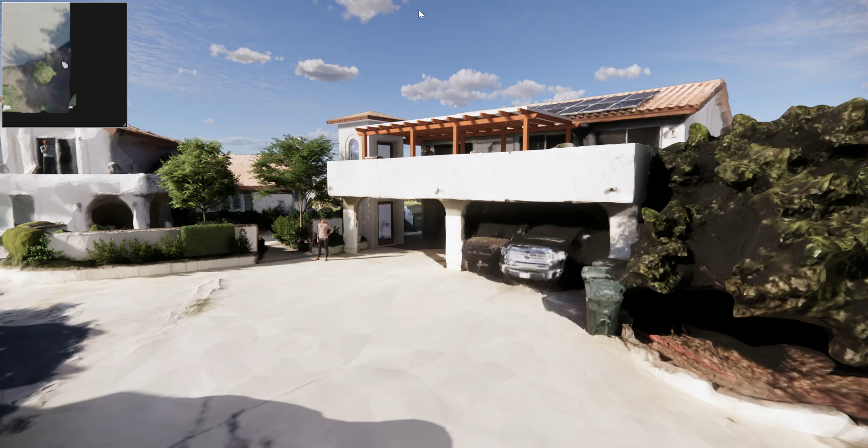So here's an update to the White Residence vertical platform lift enclosure.

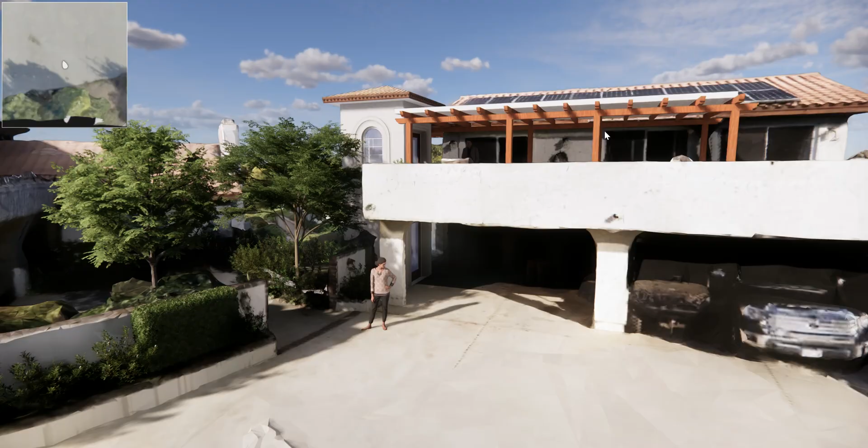I've reworked the pergola to have the columns not in front of that door, which is a good call. So they're kind of flanking each door opening. It's not perfectly spaced across here, but we've got a bigger module, smaller than bigger. It's still kind of symmetrical in and of itself. I also rotated the orientation of the members going across here. I think it's the correct orientation to have them sticking out, so they shield it nicely as you're back here.

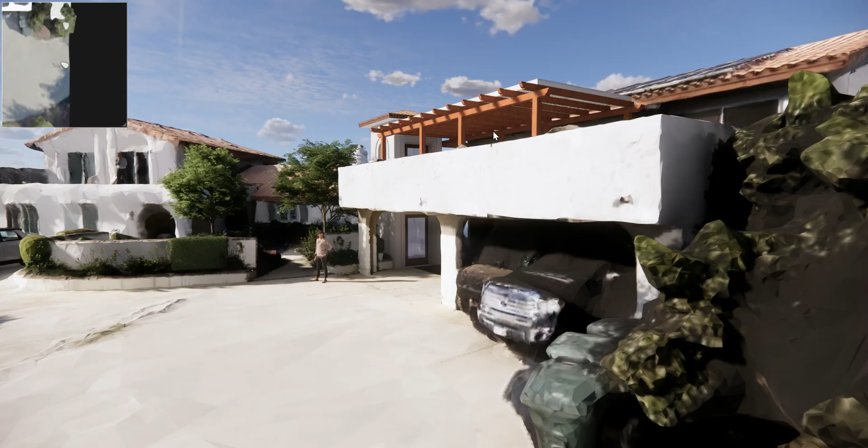And then with the operable shade device sitting on top, I changed it - so let me confirm first here.

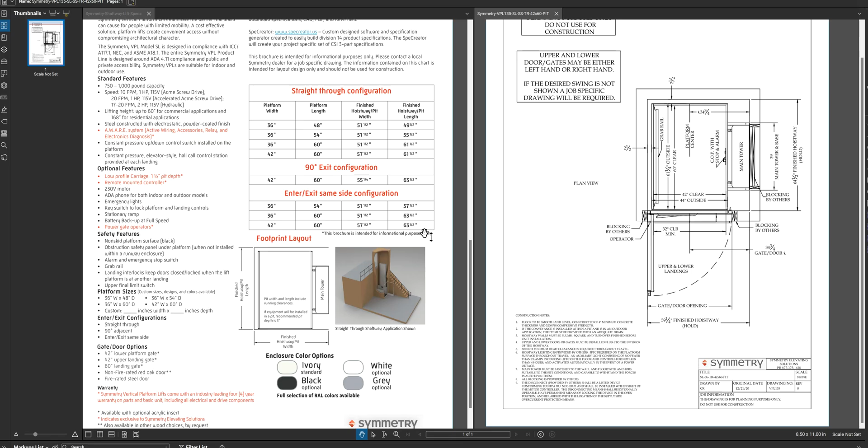So this is the model we're using - it's the 42 by 60 inch platform. This is the cut sheet, and I think it's the VPL 135, that's the drawing number. The title also says SLSSTR 42 by 60 pit, so we can confirm that's the right one. So it's the bigger one.

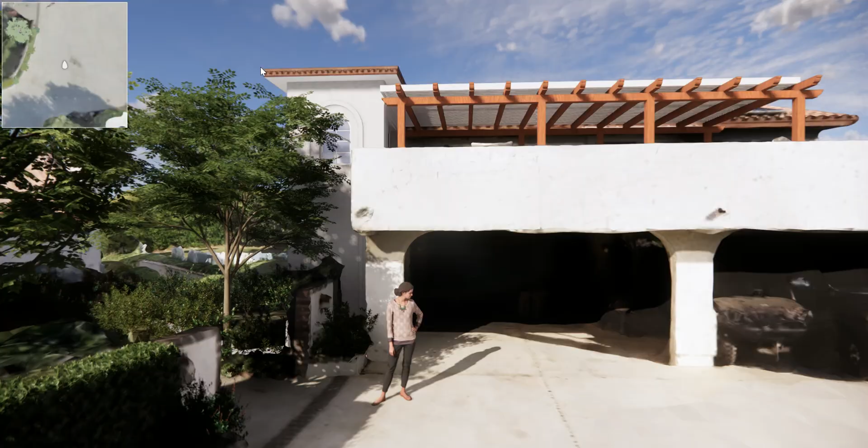And yeah, we definitely can look at a smaller platform lift and reduce the size of this shaft if we want to. I do have this key plan up here now, so we can kind of see where we're walking around.

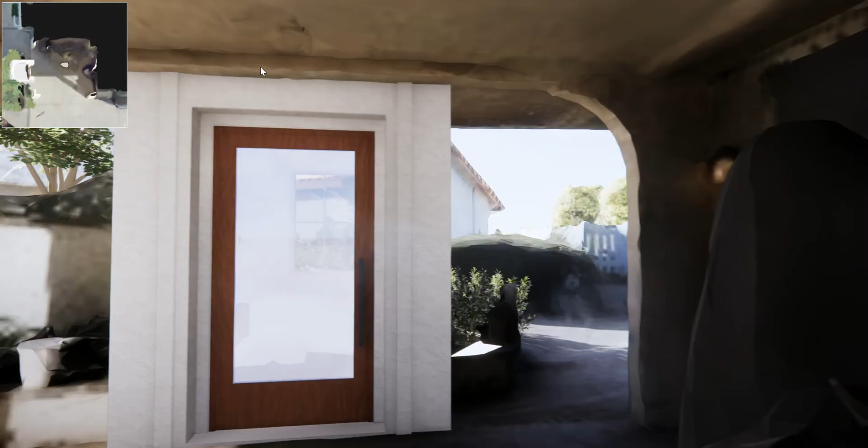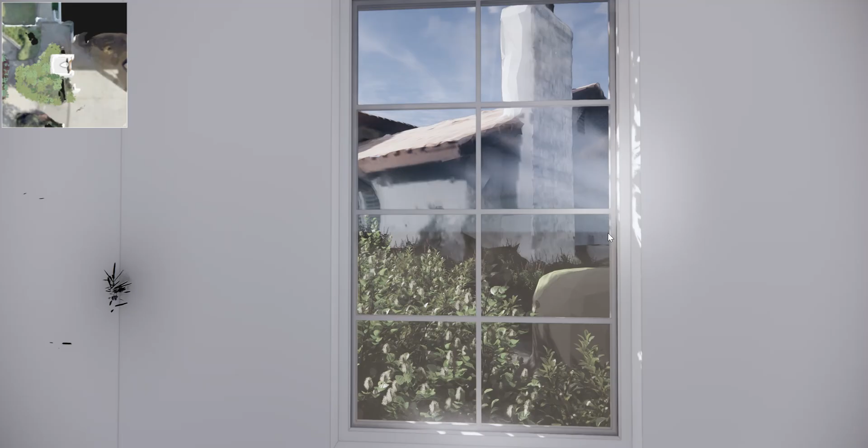For now, I'm keeping this window down below as we look through the door. I feel like it's important - we can take it out, but it gives you this open view instead of feeling like you just walked into a box. Backing in a wheelchair, it's less of an issue, but if you're walking in with a walker, I feel like it's really nice to have a view in front of you and not have three walls. To me it feels less claustrophobic and more open.

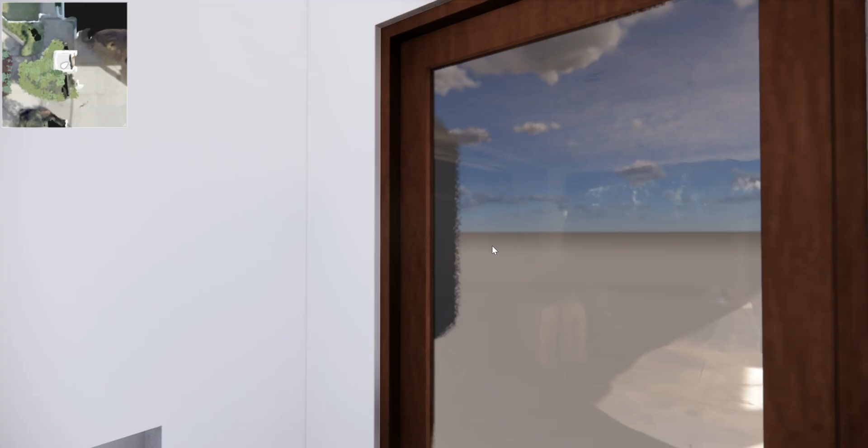One thing we will need to check - I think these windows, because it notes that the gate door needs to be flush with the shaft, all our windows may need to be flush with the shaft also. So that's something we'll confirm and make sure we can do.

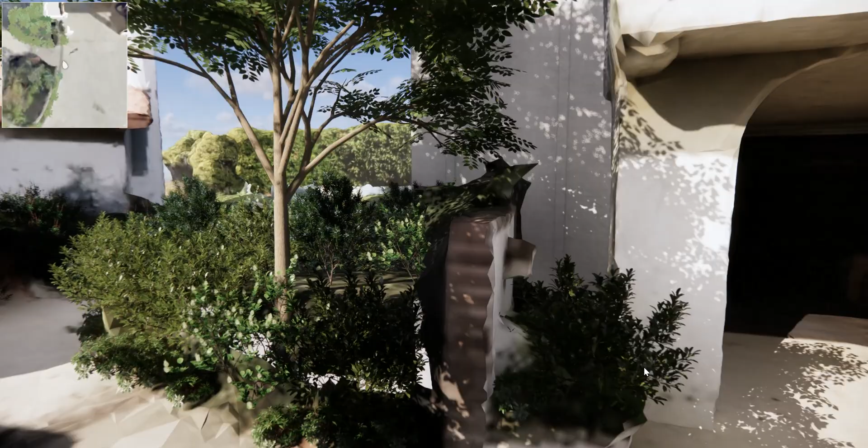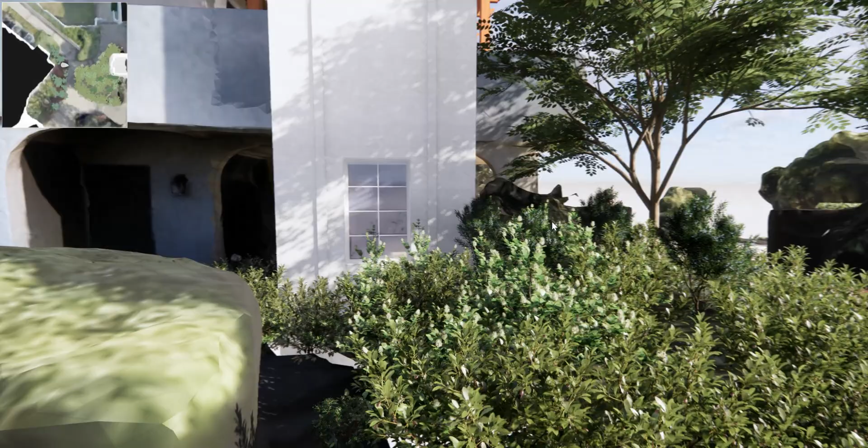And while we're on the windows, especially these west-facing ones as we come around - the windows that they require us to install now aren't heavily tinted, but they do have a bit of a tint on them, and they really don't let much heat gain at all. So they're not going to heat this thing up very much.

So I think the venting we're providing is going to be adequate. We're going to provide vents around the eaves at the top, and now I've got this vent modeled over here, so the air is going to constantly flow, get sucked up through the stack effect, and then come out the top there.

We've got this window modified, so it's got the round top and the molding goes round at the top - I like that a lot, it looks good. Then I also started to play with what happens over here, and I think we could look at a metal with like a fabric shade or a vinyl shade for the stair.

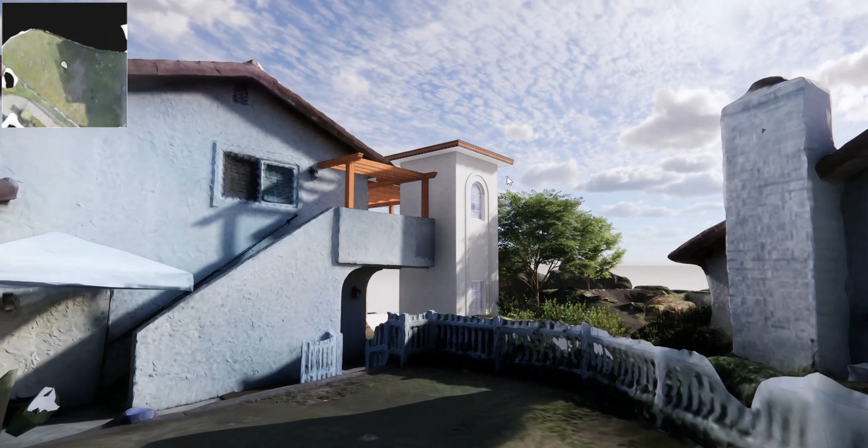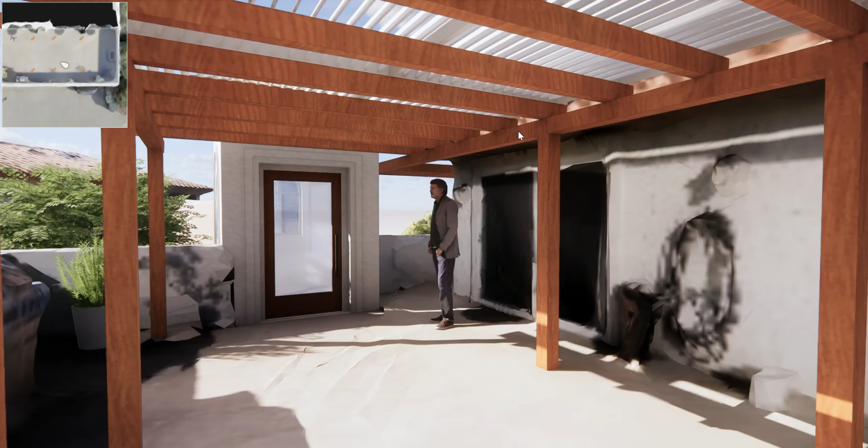But this was just kind of a look at, okay, can we create something that ties together these two systems? So I took this one post, carried it all the way through and let it land here. You can also see in the last iteration, I had a post coming mounted on the front of the elevator. I've pulled it apart. I think we might need to do that structurally anyway, not have this structure tying together the two structures. So the elevator structure up top may need to be independent of this roof structure. I was just looking at that.

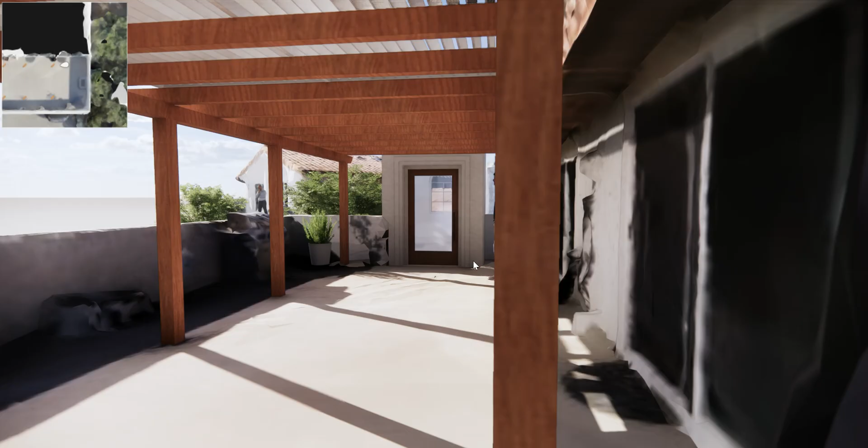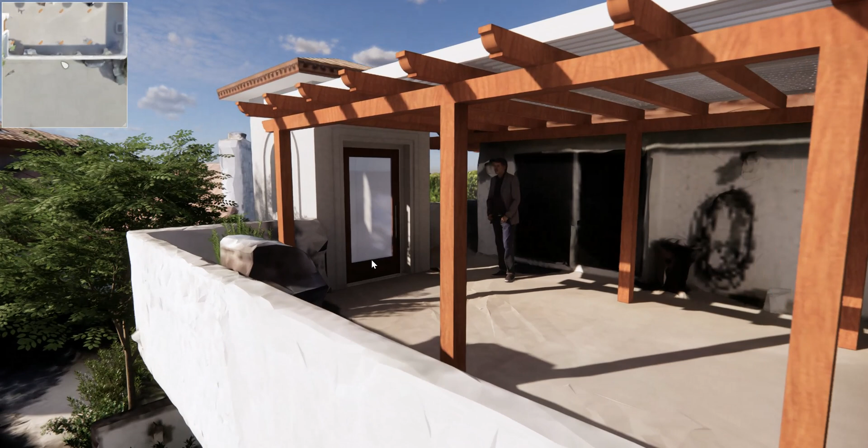Oh, and then I also have a 42-inch door, versus a 36-inch door in the last option. The thought there was that if we're doing a 42-inch platform across here, and it's 42-inch clear inside, we might want a wider door so you get full use of that wider platform. If we go with a 36-inch wide platform inside, then I think it looks better having a 36-inch wide door. We should talk about that door width because 36-inch wide probably is adequate, it's like a typical front door, but we could reduce this. I think it looks better 36 inches wide, so it's kind of a form and function question. But we need to look at, do we want a 36-inch wide door or a 42-inch wide door there?

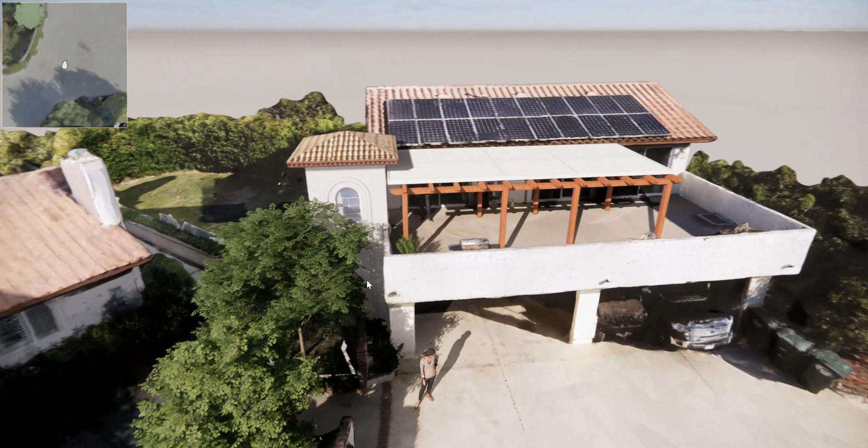But anyway, that round top there I think looks really good. It's important. Again, this wall is just going to die into the side of it. I'm going to do the view that we're never going to see it from, but just so you get some context. Let's go ahead and look at it from the balcony over here though, because that's a view that we are going to see it from.

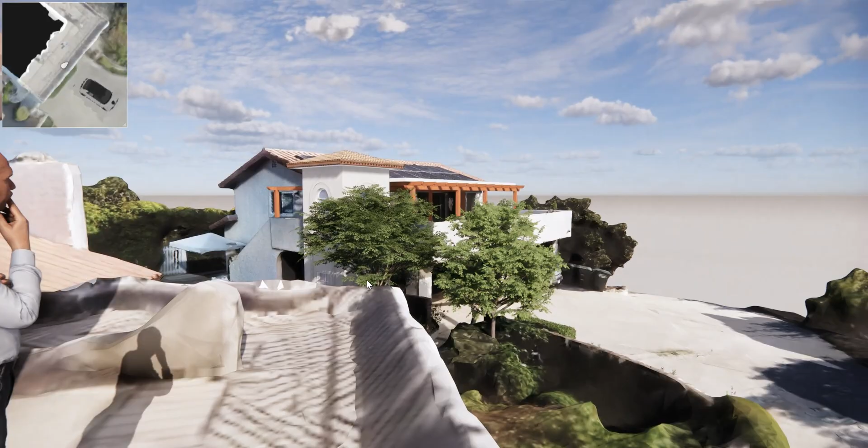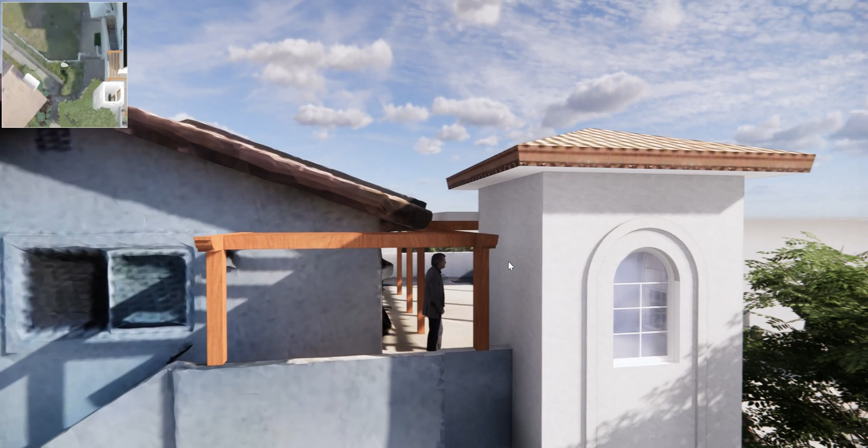So this was new, just looking at, okay, if this starts to peek through, it probably needs some framing on top of it also. We'd need to play with the height a little bit because it does start to get right into the bottom. That's why I didn't put the cross members across there—they'd actually conflict with that roof. So I could look at just lowering the whole thing a bit. I forget what it's at right now, but I think it's not that high. I think it's like at 7 feet. I'll double check that, I'm trying to put it in the email.

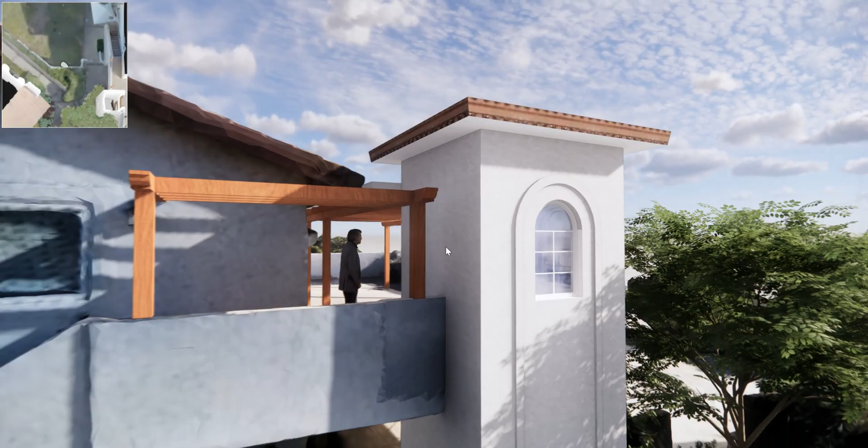Oh, and then of course we do have the recessed mailbox down here. That's easy to do, no problem. It's a great add there, and then the vent in the bottom—you can see how that's working. It needs to come up a little higher, I think.

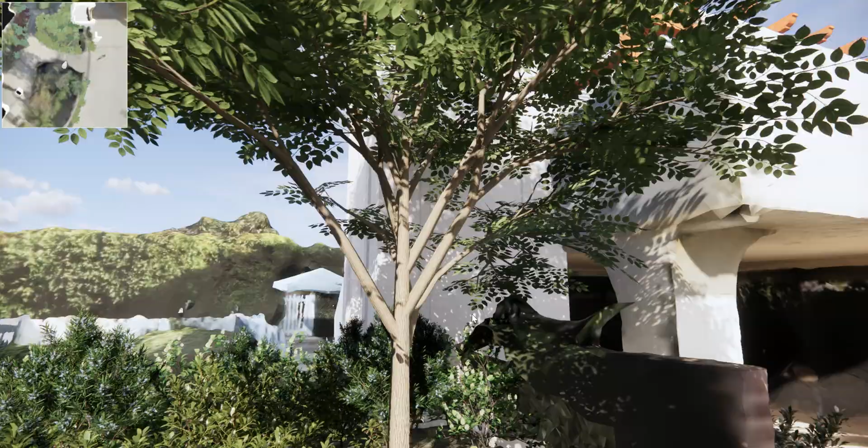I mean, I like this lower window too, just for the experience of this tower at the bottom here. It just gives a little bit more visual interest versus just having a blank wall here. So I really like that window, I think we should consider keeping it. I think it looks good, and I think when you walk in, you just really want a view to be able to look out somewhere. So it's not like you're walking into an enclosed shaft like it is. It makes it feel a little bit more open.